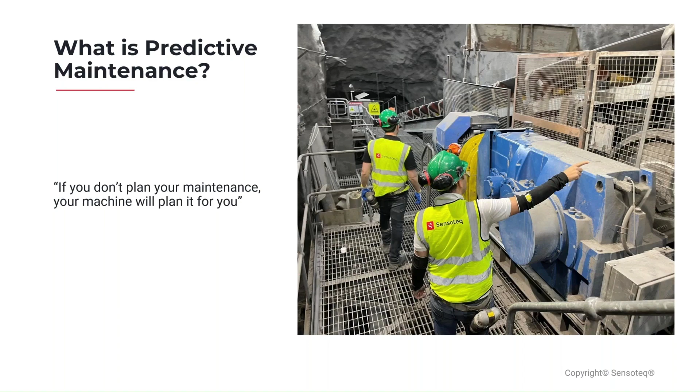Excellent. And in terms of the process around that, this is my probably relatively naive view of it, but I've always seen it as, through some means you have to measure the vibration, then you get that data to someone who's actually going to do the analysis, and then it's their job to understand that data and make a recommendation as to whether or not that machine needs repaired or what part of that machine needs repaired. And the way I see it, whether it's wired or wireless, I think the process is the same.

So on the wired approach, well, what does that mean? Well, there is, I guess, what we might call a traditional method of capturing data, so condition monitoring. And Stuart, could you maybe give us a bit more detail about what that traditional method is, the route-based?

Yeah. So it varies site to site. I mean, there's quite a few sites now that have got internal reliability teams where they're collecting the data on site. So let's just talk vibration for a minute, maybe with a vibration analyzer, and they'll have different routes set up. Now, a lot of balance of plant equipment is probably done on a monthly basis. They've probably got some more critical plant that's maybe done weekly even.

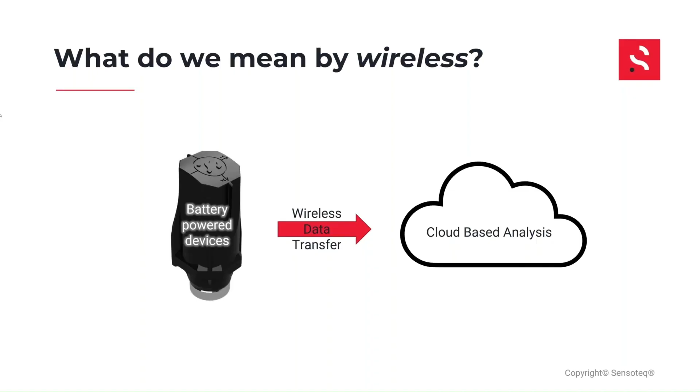Which brings us quite nicely on to the next question, which is why actually use the wireless technology at all? And the first point that I have listed here is accessibility. What do I mean by that? Well, I think that the wireless technology has actually reduced the barrier of entry for condition monitoring for a lot of people by making it quite an affordable method of monitoring quite a wide range of machines. And that affordability itself means that people who maybe weren't looking at it before are now looking at this technology, making it more accessible for them.

It also means that you can acquire data that maybe you wouldn't have been able to before if a machine always is running as part of a batch process, for example. If you're doing route-based measurements, you sometimes have to turn the machine off to remove the guard and then stick your piezoelectric sensor on it and then take that measurement. But now you can fit the sensors and leave it whilst the machine's running 24/7, if that's the case. I'm sure you've seen this, Stuart.

What I see a lot on sites, David, and I see it more and more, is a lack of resource, really, to be able to collect the data traditionally. Even though we've got really fast analyzers now, some of the sites you go to, you might be doing in a couple of surveys over 500 assets with probably 8 to 10 points per asset. There's quite a time to do that, and a resource to put someone out to do that.

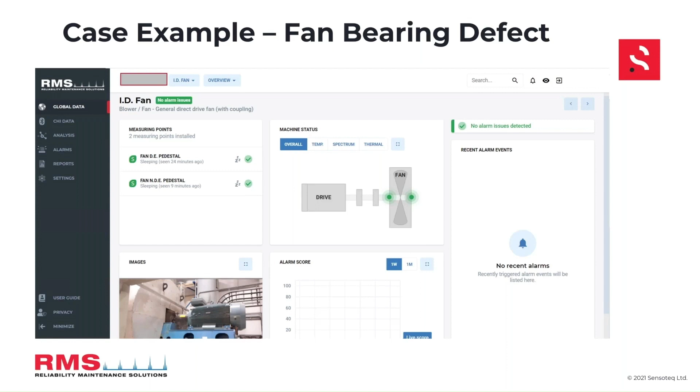Yeah, there we go. So this was on a power plant, a fan, and we only had a couple of sensors on the fan bearings. We were doing a trial with other sensors elsewhere. Normally, if we were monitoring this, we'd have sensors on the motor as well. But we were just looking at the fan bearings. So if you just want to go to the next slide, David, please.

So this is some trend data off this fan. The velocity RMS values are at the top, and then one of my favourite parameters for looking at impacting type problems, bearing defects, is in Gs, monitoring the waveform peak to peak. You can see we've got quite a few months spanning. What was interesting here is that the peak to peak trend at the bottom picked up, starting to get some higher Gs on this fan bearing drive end quite early.

And one of my colleagues actually put a request in. As you can see, it broke the alarm levels on the peak to peak. The levels were getting quite high. I think we're up to 30 Gs there. And we requested them to change the bearing. Unfortunately, they really didn't want to shut it down because of the power plant. They couldn't turn it off, so we just kept monitoring it.

So this one went way beyond where I'd normally pull a bearing, and you can see in the velocity trend towards the end, we start to get really high levels. We've got looseness there as the bearing starts to go. And at the bottom, the peak-to-peak waveform trend, that's quite typical, where when you get a fault that progresses from a normally spalled bearing to the clearances having gone and it's starting to fall to bits, you will actually get a reduction in the G's vibration. So that's a good sign that this thing really does need to be looked at.

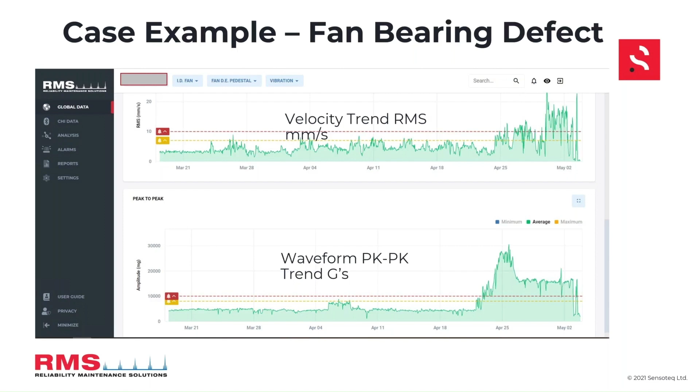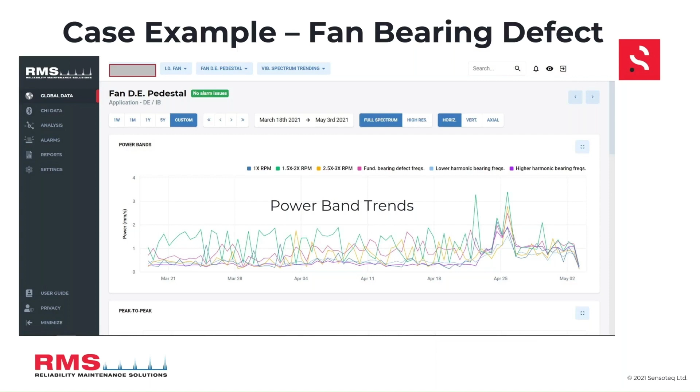So if you go to the next slide, David, I think we got some temperature data as well on that. Now they're the power bands, just looking at the individual power bands. If you go to the next slide, David. There's some historic spectrums, and you can see we've got some higher frequency energy, and it's progressed from some actual peaks to just a noise floor because this bearing is in quite a bad way. Next slide.

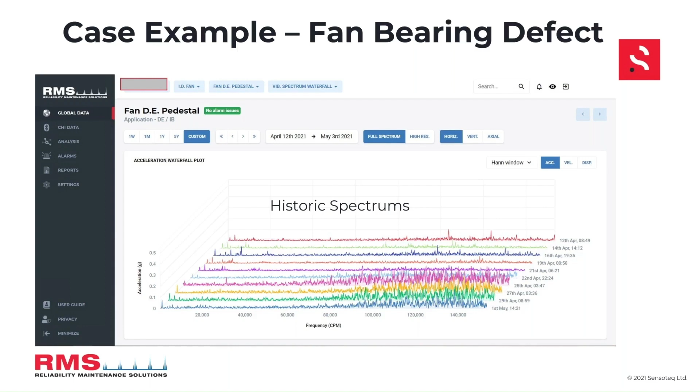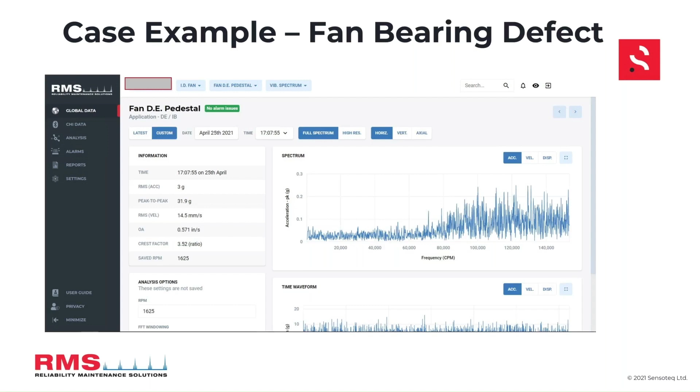So I think that's just a spectrum and waveform there. You can see we've got a time waveform. It's a bit cut off there, but we've got quite high Gs on that, peak to peak of 32 Gs there. So quite a well-developed fault, not looking good. And then I think the last slide, we've got a picture of the bearing. It's on the shaft.

So yeah, that was a pretty bad one, really. So like I say, it was left in way longer than I would have. It didn't damage the shaft, fortunately, but the bearing was not in a good state.

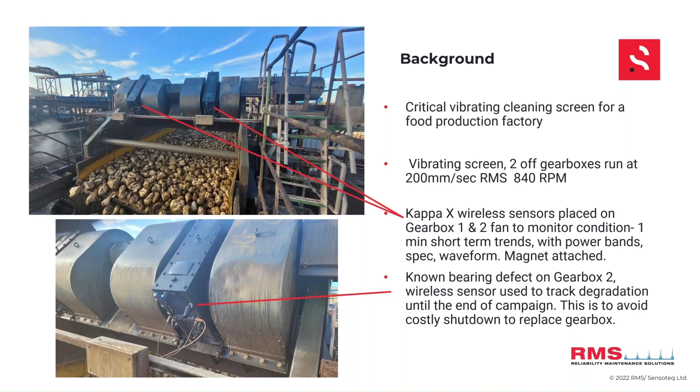I said, we've got this wireless kit, let's put the wireless on. So we put some wireless sensors on there. And if you go to the next slide, we picked up the bearing defect with the wireless technology as well. And you can see there on the left-hand side, we've got the peak-to-peak G's trend. And over February to April, we had an increase there. But the beauty was, it gave us a comfort factor that we could see the data daily. Yes, it was increasing. We knew it was failing.

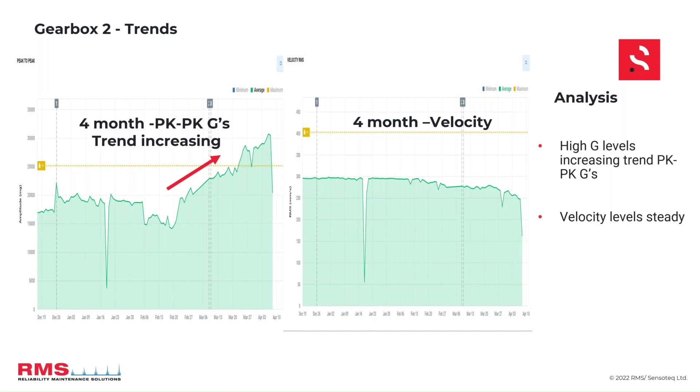It was getting worse. But if you go to the next slide, when we looked at the wireless data, we could see it was an inner race fault that basically wasn't changing. So in other words, I didn't see an outer race appear. I didn't see a cage defect appear. It was just an inner race. So I knew that the inner race of the bearing was probably quite damaged and progressively getting worse. But we had that comfort factor because we had the data to say, you know what, let's keep running with this. I'm not too concerned.

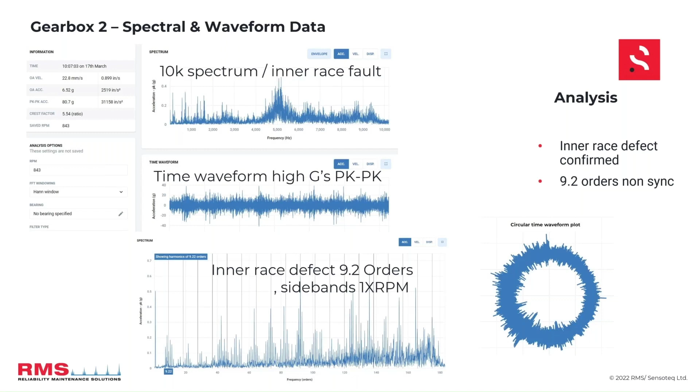If it had shot through the roof and I'd have got like 68 Gs, I would have said, look, guys, you're really going to have to shut this down or you're just going to wreck that gearbox. But it didn't. And if we go to the next slide, you can see here's the progression of the fault. So we've got the 2.5K frequency at the top, sort of a waterfall plot. You can see lots of little spikes with sidebands. This is a classic inner race fault getting worse.

And then we've got the 10K, the even higher frequency plot, and we've even got more data higher up. So this is the wireless data. So it's really great data. This is what we see day in, day out as vibration guys. If you go to the next plot, David, please.

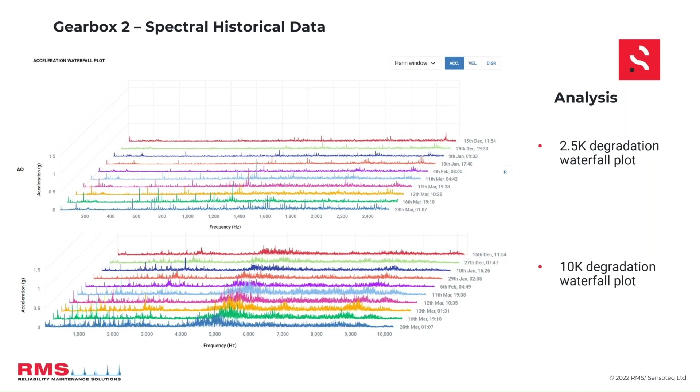So we managed to nurse this to the end of the campaign and took the gearbox out, and you can see there was an inner race defect on there. And quite bad spalling, but probably would have run maybe even a few more months, to be honest. But obviously, you've got debris going around the gearbox, just going to start attacking elsewhere.

So for us, it was great. We didn't need to put a resource on going up every day. We could just monitor it and just have a comfort factor really as well. So that saved quite a lot of money there, the shutdown. So it was a great use of the technology on a bit of a troubleshoot type problem.

Yeah. And did you find, Stuart, that the understanding then of the vibration and, I guess, the outcome was well understood across the plant with who was involved? Yeah, exactly, because imagine you're on a site and you've got this fault on a supercritical piece of kit. You've taken some data, say, a few days ago, but now you're like, what's it doing? But where you've got the wireless data, you can just dial in, have a quick look, see what it's doing 3 minutes ago.

So that comfort level basically gives you the information to make an informed decision. Do I leave it, or am I really going to have to change this? So yeah, it worked really well across the site, and saved some good money.

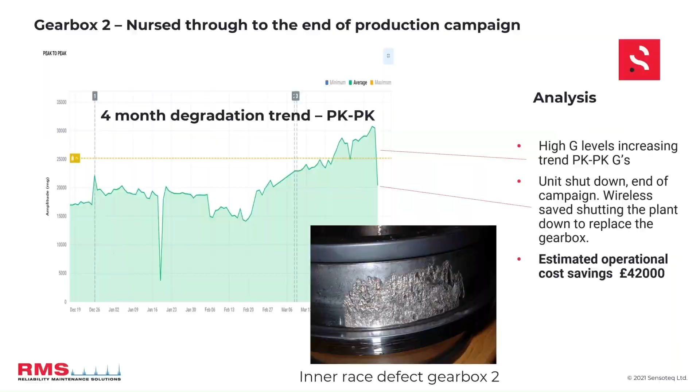We do have one last case study. I think it's a relatively quick one, which is an unbalance one, if you want to talk through this, Stuart. Yeah, so this one, a relatively simple fault, really, a classic unbalance fault, but again, a good example with wireless where we've got this gas fan that's related to a power plant and a big dryer system, so it's part of an animal feeds plant. And basically, we were trialling the wireless.

You can see the 4 sensors on there positioned on the asset, the fan, and if we go to the next slide, they shut down this fan, which they often do. It's part of the dryer process on this plant. It's on and off sometimes. The vibration levels were good, I think less than 4 millimeters per second. And then if we look on the right, when they started that fan up again, it was quite high. It was up at 20, so we got an alarm quite quickly.

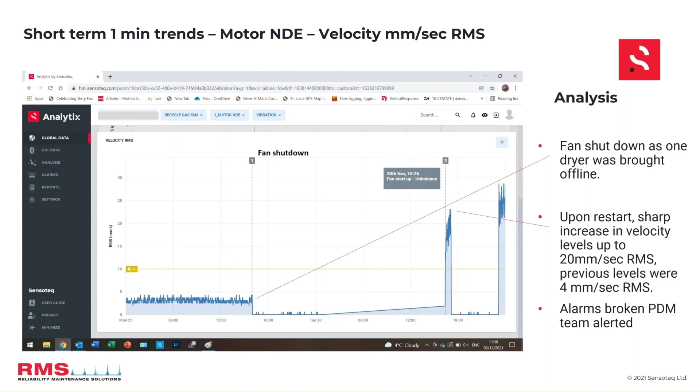Now, this had only been monitored by the routine team, I think 2 days before this. So on their sheets, it was like, gas fan's good, no problem. But suddenly the wireless is saying, I'm not happy now, I'm doing 20 millimeters per second. And if we go to the spectral data, you can see we've got a high vibration at the running speed, a large spike at 1 times the fan.

So what puzzled us with this, I talked to the customer and said, look, could this have dirt on it? Could it have a build-up? Although we had no trend of that, it was pretty instant. I was quite worried because I thought, has a blade come off? Have I got a crack on the impeller here? So I said to them, you really need to inspect this. And they came back and said, well, really, it shouldn't get dirty, this fan. It really shouldn't. So it made me even more concerned.

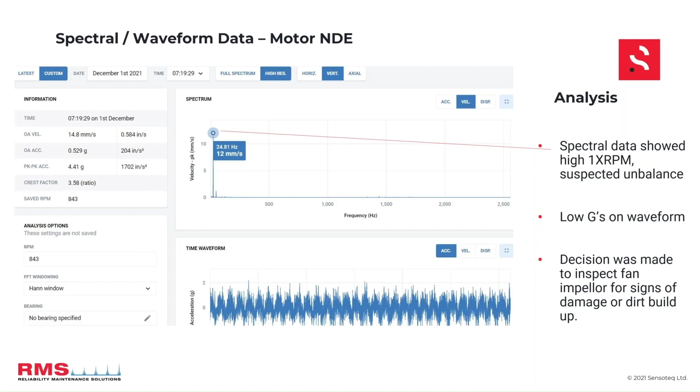So eventually, after a few days, we managed to get the fan down, and if we look at the pictures, they had an inspection inside, and it was absolutely covered with dirt. Have you got that next slide, David? Yep. Sorry, it's a bit slow. Yeah, there we go. So we've got some before and after, and it was absolutely caked inside.

They were absolutely shocked. So we deduced that when they'd stopped that fan and restarted it, because they inspected it for cracks and it was fine, maybe a chunk of dirt had come off the impeller and just sent it out of balance. So they gave it a thorough clean, and away they went. But they were now looking into why there was dirt build-up getting in this fan as well. So it's led on to other investigations on the plant, because it really shouldn't be getting dirty in there.

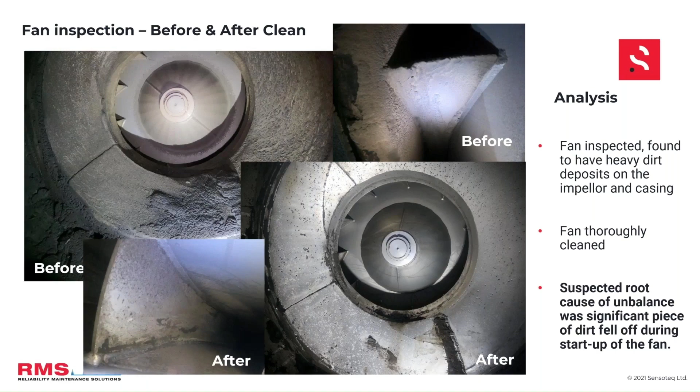So again, if we'd just been doing those monthly readings there, which they were, if we didn't have wireless, that could have been absolutely hammered for at least 4 weeks, might have even led to a bearing failure, some other problem we wouldn't have known. But the wireless picked it up there and then.

So we can see there the before and after when they cleaned the fan, and you can see on the data, it's actually better than it's ever been. It was down at 1 millimeter per second after the clean. So yeah, really good data.

Yeah, I think this is a really interesting one, Stuart, because we've worked with a number of customers in North America, particularly waste and recycling facilities, who use the vibration sensors. They use it for predictive maintenance too, but also for process. And they had lots and lots of fans that would get dirty from time to time, and they didn't know when they would have to go in and clean them and stop them.

And they were actually using wireless vibration sensors for that, so they could see the trend building up. There was dirt and stuff getting on these fan blades, and then once it got over an alarm limit, they would go clean it, they would see it come down, they'd get the feedback as well to say, yeah, okay, it's all good now.

Oh, it's an excellent way of doing it. And again, I was on site 2 days ago, and these unbalance faults sometimes, with a certain type of fan bearing, especially these plummer block, they really don't like it when they get raised levels of unbalance, and then it can lead quite quickly to looseness, fretting problems on the bearing.

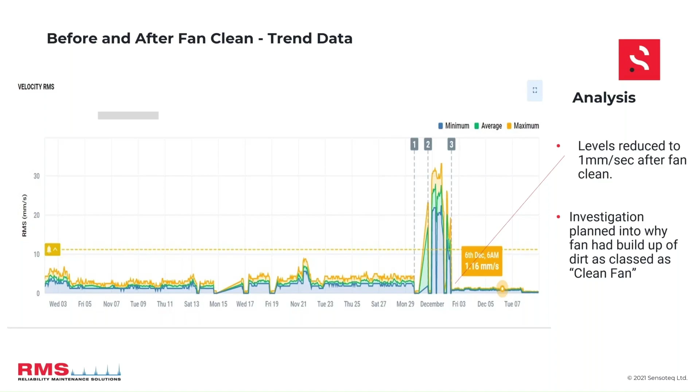So if you can, like you say, use this technology to pick up these problems early, get it cleaned early instead of letting it hammer it for a month or two, the reliability of your assets just increases because you're just not having to repair them as often. Yeah, that's the end of the case studies, and now we're on to answer any questions that you might have about any of the case studies or anything that we've discussed today.